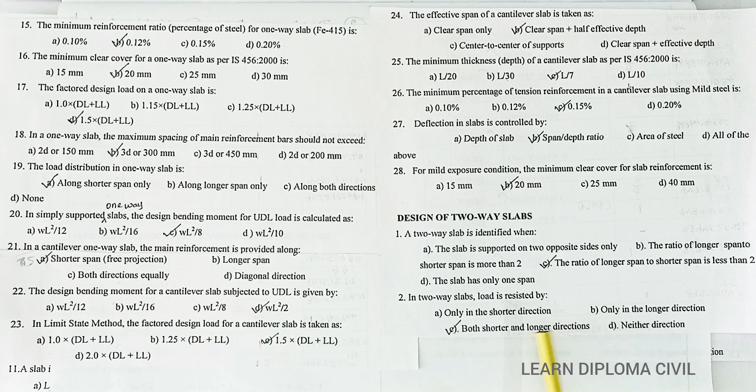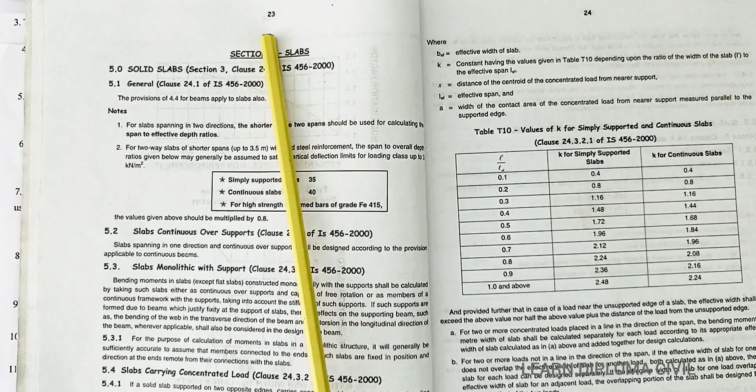Question number 3: The minimum thickness of a two-way slab according to IS 456 is L by a given number, based on the basic span to effective depth ratio. As per code book page 23, for slab spanning in two directions, the span to effective depth ratio for simply supported slab is 35. So thickness of slab is calculated as span divided by 35. The answer is D.

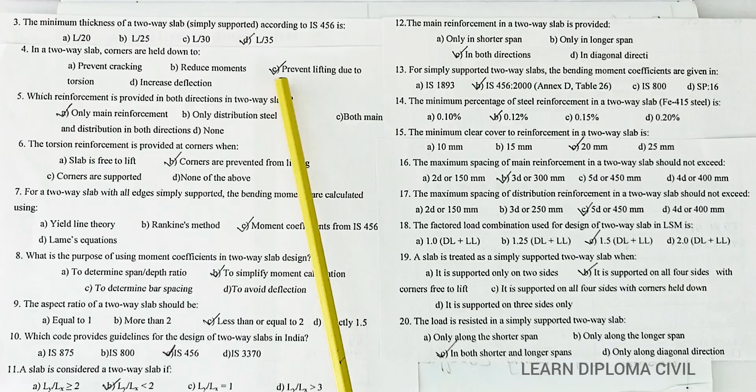Question number 4: In a two-way slab, corners are held down to prevent lifting due to torsion. As you know, in a two-way slab all 4 corners tend to lift upward, and holding down the corners prevents this. So the answer is C.

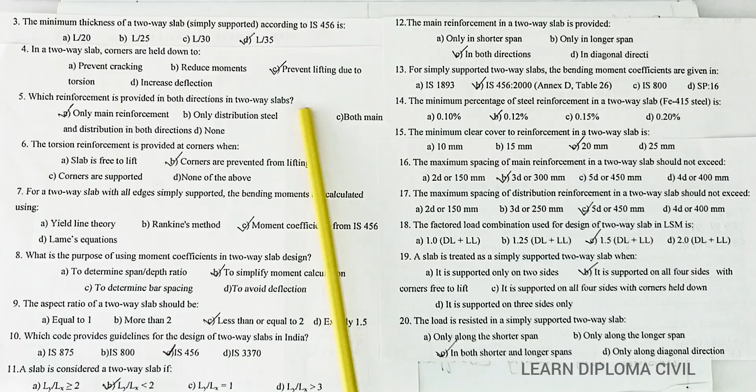Question number 5: Which reinforcement is provided in both directions in two-way slabs? The answer is A, only main reinforcement rods. Question number 6.

The torsion reinforcement is provided at corners. The answer is B, to prevent corners from lifting. Torsion reinforcement is provided at the corners specifically to prevent the corners from lifting up. So the answer is B.

Question number 7: For a two-way slab with all edges simply supported, the bending moments are calculated using moment coefficient from IS 456. The answer is C. In a two-way slab, the formula for calculating bending moment uses moment coefficients.

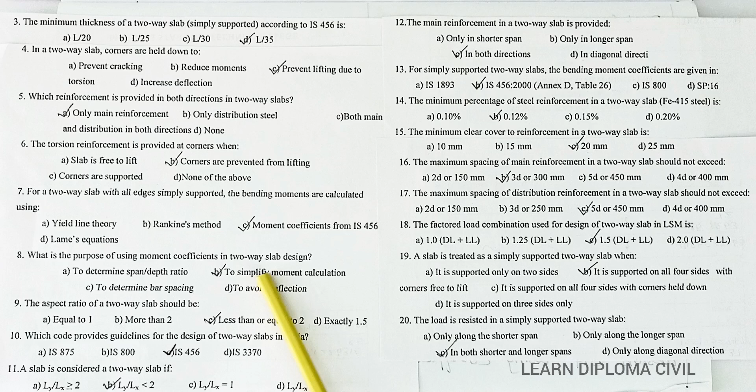Question number 8: What is the purpose of using moment coefficient in two-way slab design? The answer is B, to simplify moment calculation.

Question number 9: The aspect ratio of a two-way slab should be, aspect ratio means length divided by breadth ratio. For a slab, we can consider its longest span divided by shortest span. So the answer is C, less than or equal to 2.

Question number 10: Which code provides guidelines for the design of two-way slabs in India? The answer is C, IS 456.

Question number 11: A slab is considered a two-way slab if Ly by Lx is less than 2. The answer is B. You need to read the wordings carefully and also know the formula.

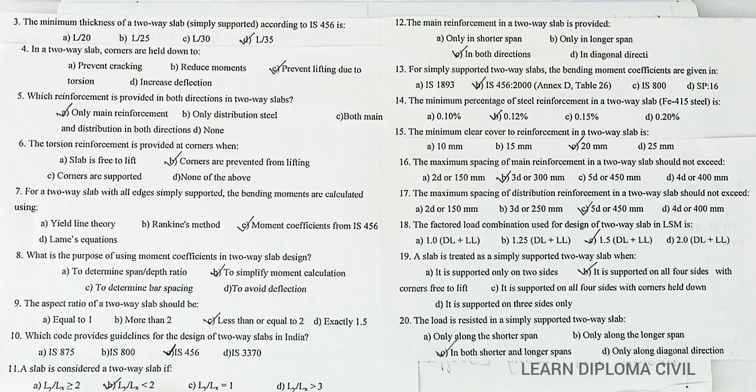Question number 12: The main reinforcement in a two-way slab is provided in both directions, that is shortest span and longest span. The answer is C.

Question number 13: For simply supported two-way slab, the bending moment coefficients are given in IS 456 2000. The answer is B.

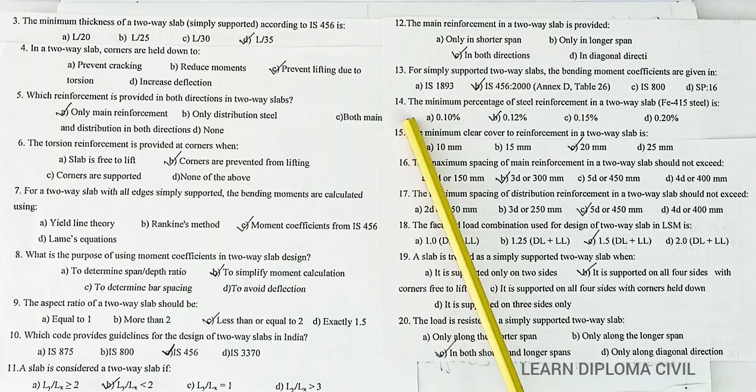Question number 14: The minimum percentage of steel reinforcement in a two-way slab for Fe 415 steel is 0.12% for high strength deformed bars. The answer is B. Whether it is one-way slab or two-way slab, the answer remains the same.

Question number 15: The minimum clear cover to reinforcement in a two-way slab is 20 mm. The answer is C. It is 20 mm for all slabs.

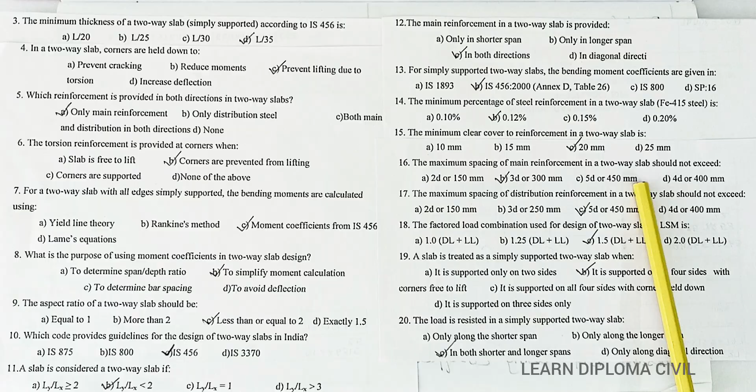Question number 16: The maximum spacing of main reinforcement in a two-way slab should not exceed, this is already the same answer as seen for one-way slab. For main reinforcement, the answer is B, 3D or 300 mm.

The maximum spacing of distribution reinforcement in two-way slab should not exceed, it is same as one-way slab. So the answer is C, 5D or 450 mm. Question number 18.

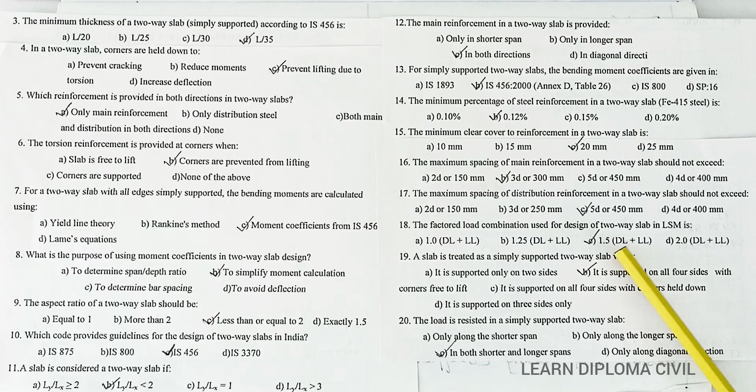Factored load combination used for design of two-way slab in limit state method is 1.5 into dead load plus live load. The answer is C. Load factor gamma F value is 1.5. So the answer is C.

Question number 19: The slab is treated as simply supported two-way slab when it is supported on all four sides with corners free to lift. The answer is B. Only when corners are free to lift is it a simply supported two-way slab.

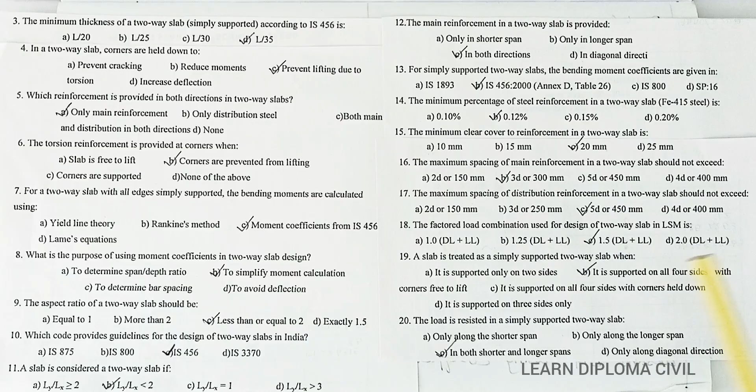Question number 20: The load is resisted in a simply supported two-way slab in both shorter and longer spans. The answer is C. A two-way slab means load distributes in two directions, so load must be resisted in both directions.

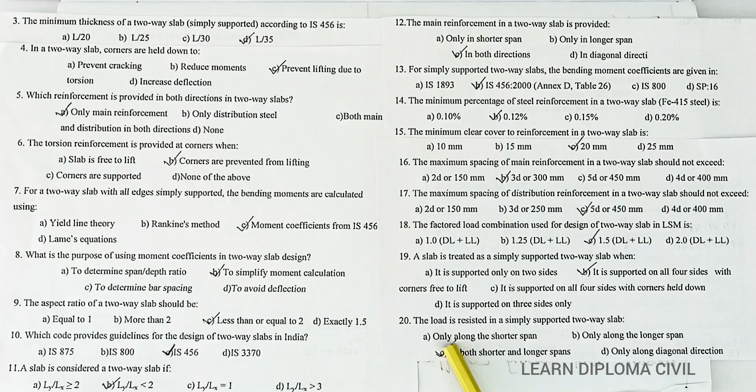Question number 21. For a simply supported two-way slab with corners free to lift, the bending moment is calculated as, the answer is C, both A and B. A is mx equal to alpha x w into lx square, the shortest span bending moment, and B is my equal to alpha y w into lx square, the longest span bending moment. Both need to be calculated, so the answer is C.

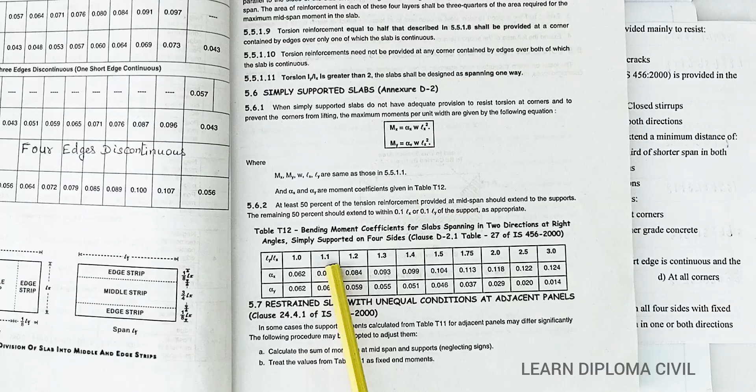Question number 22. The values of coefficients alpha x and alpha y depend on, the answer is B, aspect ratio of slab, that is Ly by Lx. In the codebook page number 28, the table for moment coefficients for simply supported two-way slab shows that alpha x and alpha y both depend on the Ly by Lx value.

Question number 23. The effective span of a simply supported two-way slab is taken as, the answer is D, clear span plus effective depth or center to center of supports, whichever is less. This answer we already saw in codebook page number 17.

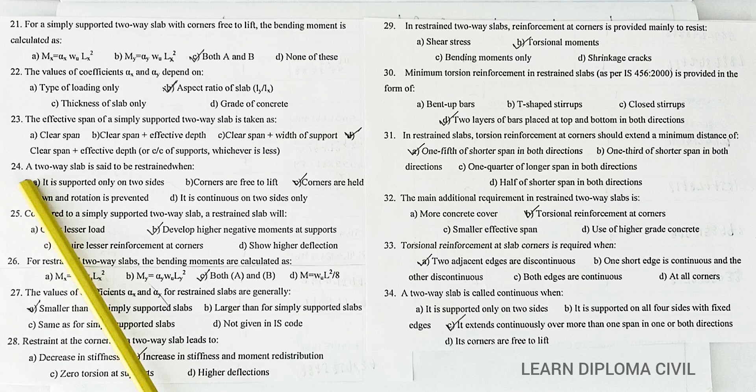Question number 24. A two-way slab is said to be restrained when, the answer is C, corners are held down and rotation is prevented. When rotation at corners is prevented, that means the corners are held down, that is a restrained slab.

Question number 25. Compared to a simply supported two-way slab, a restrained slab will, the answer is B, develop higher negative moments at supports.

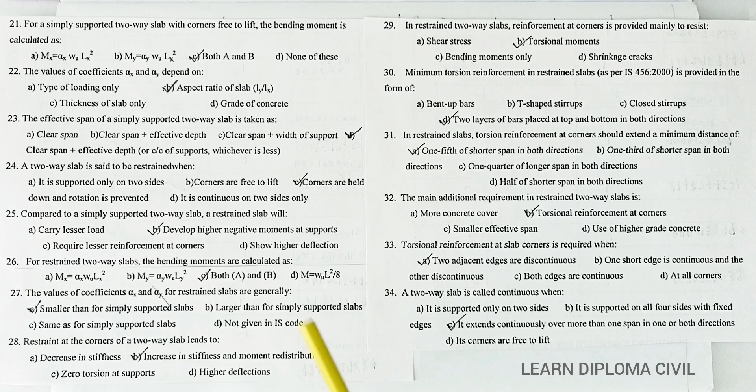Question number 26. For restrained two-way slabs, the bending moments are calculated as, the answer is C, both A and B. A is for short span bending moment, B is for long span bending moment. Both values need to be calculated, so the answer is C.

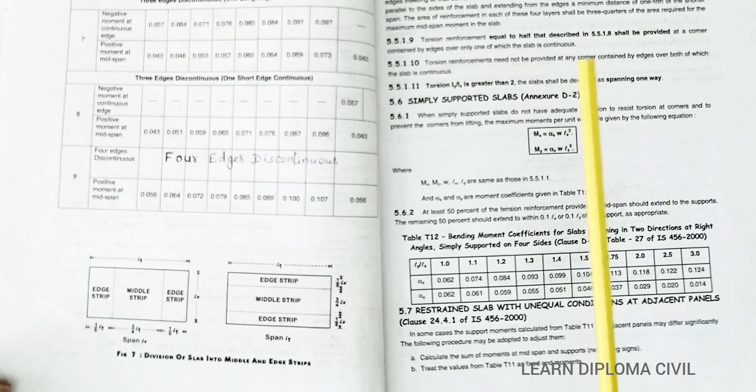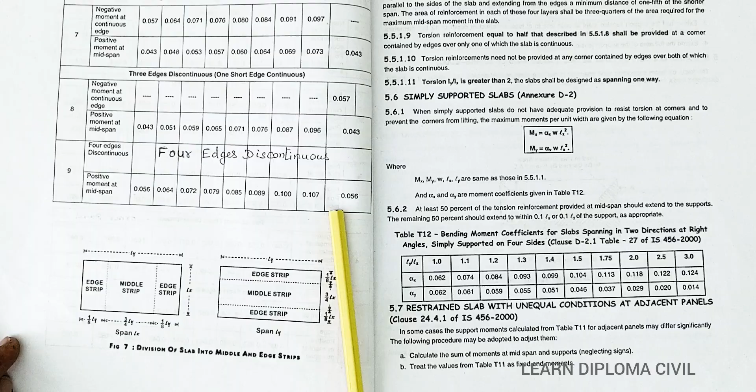Question number 27. The values of coefficients alpha x and alpha y for restrained slabs are generally, the answer is A, smaller than for simply supported slabs. If you refer the codebook, page number 28 has coefficients for simply supported slab, and page 27 table number 9 has coefficients for restrained two-way slab. Comparing both, the restrained slab coefficients are smaller. So the answer is A, smaller than for simply supported slabs.

Question number 28. Restraint at the corners of a two-way slab leads to, the answer is B, increase in stiffness and moment redistribution.

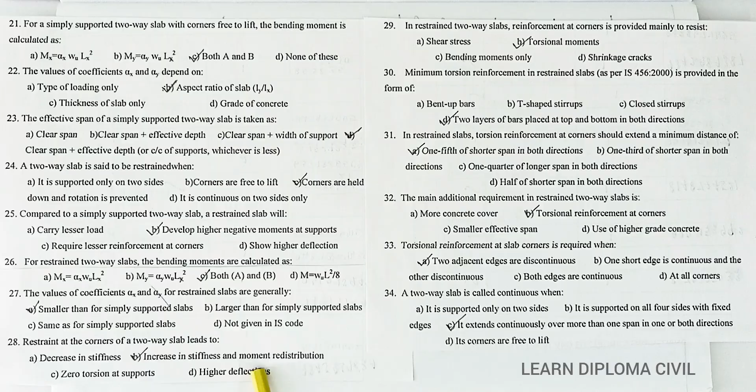Question number 29. In restrained two-way slabs, the reinforcement at corners is provided mainly to resist. The reinforcement rods provided at corners are meant to resist the corners lifting due to torsional moments. So the answer is B, torsional moments.

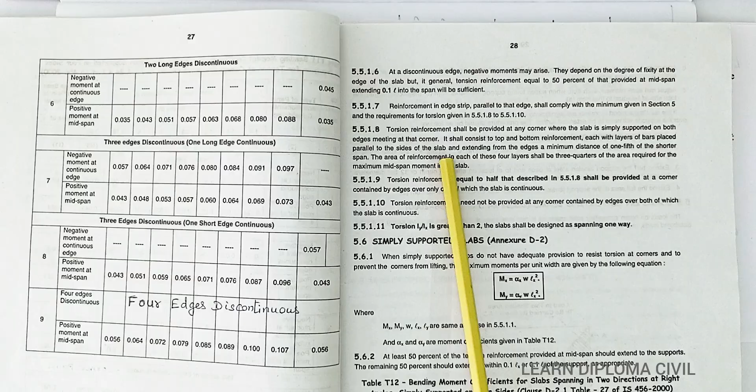Question number 30. Minimum torsion reinforcements in restrained slabs as per IS 456 is provided in the form of, the answer is D, 2 layers of bars placed at top and bottom in both directions. This answer is in codebook page number 28, third paragraph: torsion reinforcement shall consist of top and bottom reinforcement with layers of bars placed parallel to the sides of the slab and extending from the edges. So the answer is D.

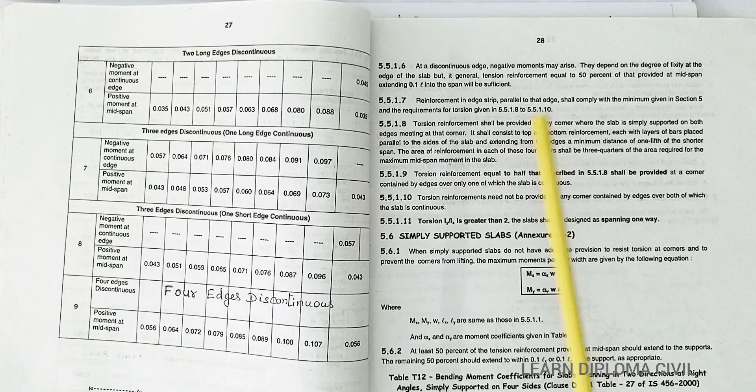Question number 31. In restrained slab, torsion reinforcement at corners should extend a minimum distance of. The length of torsion reinforcement to be provided at corners is given here. This answer is also on page number 28, same paragraph, third line, which gives the distance for torsion reinforcement: a minimum distance of 1/5 of the shorter span. So the answer is A, 1/5 of shorter span in both directions.

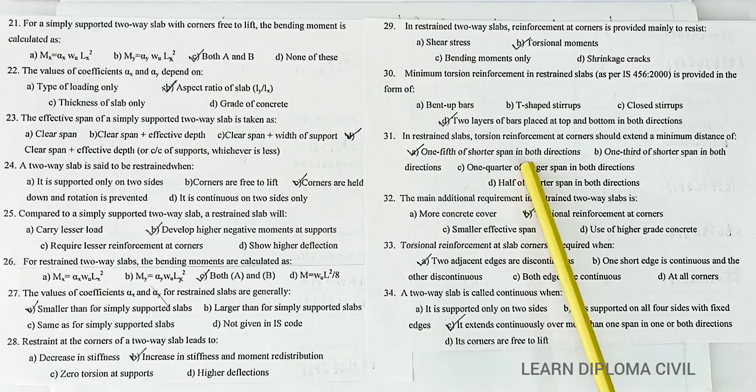Question number 32. The main additional requirement in restrained two-way slabs is. After providing the main rods and distributors in a restrained two-way slab, the additional reinforcement provided is the torsional reinforcement. So the answer is B.